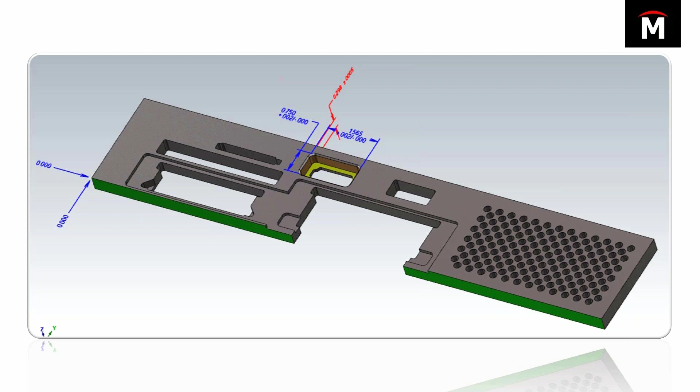So in this product, we're going to have it not only update for the G54 XYZ location, but we'll do a rotational update so that it outputs a G68 to our program to allow for an angular correction, thus giving you the confidence that even though the part could be potentially loaded off the pin a bit, it'll still run within tolerance. And then as we go through this, we'll cut the feature, and then we'll do in-process inspection, check these settings to make sure that the part is right, and if we need to, we'll update it.

So the next slide, I'm zoomed in a little closer on this. You can see on the length and the width of this pocket feature, we've got plus 2 thousandths minus nothing. Then on the depth of it, 0.298 plus or minus half a thousandth. These are the kind of things you run into in machining. Machining by nature is a very precision process. And when you've got tolerances like this, you have to really stay on top of it on the machine to make sure things are run accurately. And if it's run out of position for your true position tolerance, then the part's no good. It really leads to a lot of wasted money very quickly if you're not careful.

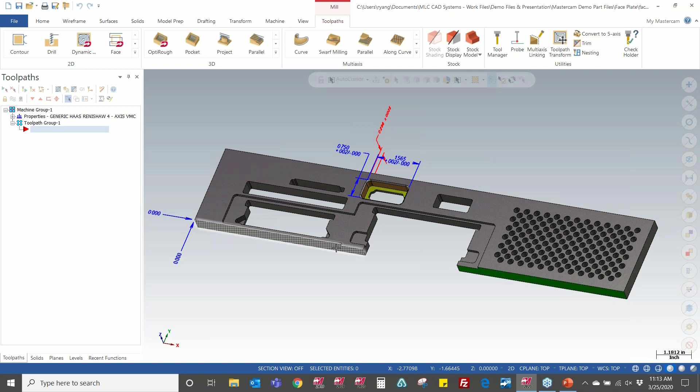What I intend to show you with this product is that this allows you to have the confidence that you can actually walk away from the machine and know that it's running accurately. Now, I'm not saying that you don't have to check your parts at all. There's still no substitute for checking them manually, but this gives you the confidence that the machine is checking itself. So let's go ahead and get down to it and have a look at how this product works. So here's the part file that I had in the slide, and we're going to start off by just setting our G54 XYZ location at this lower left corner of the part.

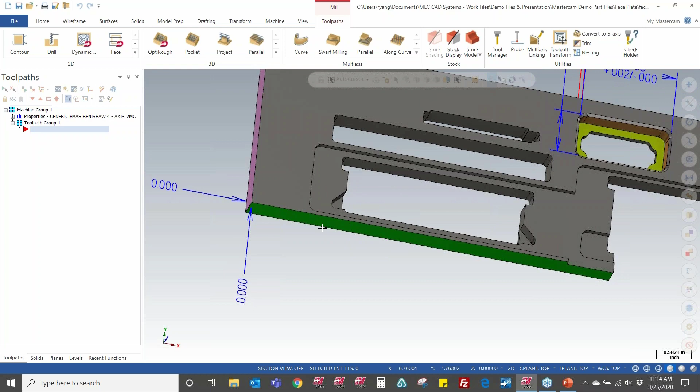So to do this, the first thing I want to do is draw some geometry to help me place the probe positions a little more easily. So I know I'm going to be probing for a G54X and a G54Y. And I'm going to do this by just drawing simple lines. I'm going to start by drawing a line to represent where I want my X to probe in from.

So I want to make sure that I'm in a 2D mode. I'll set my Z placement about the midpoint of this edge. Just when I'm drawing, it draws it down at that position. So I'm going to draw a line first. I'm going to offset the beginning point of this upward from there about ½ an inch. And I'll click, and that sets my first point.

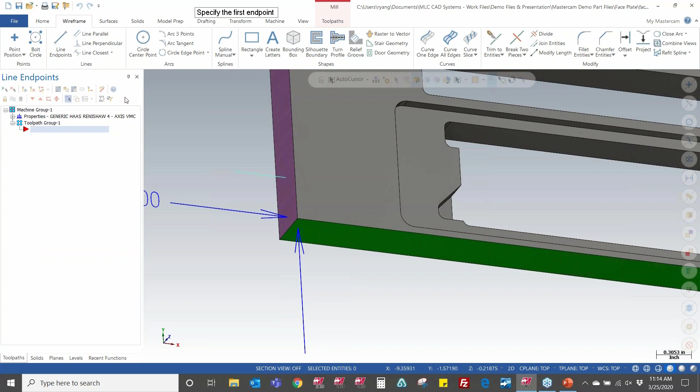And I'm going to draw that line straight out at a length of, we'll say, ½ an inch. So, this gives me a starting point and an end point for that. So now that I've got that line drawn in, I'm ready to do some probing on this.

So with Productivity Plus, it is an add-on to Mastercam. You have to purchase that add-on to run within the software. And if you have that add-on or not, you'll still see the probe button. You'll find it on the Toolpaths tab when you're in Mill. If you click it and you don't have a license, it'll just tell you that you need to get a license first. But here we've got what we need, so we'll keep going.

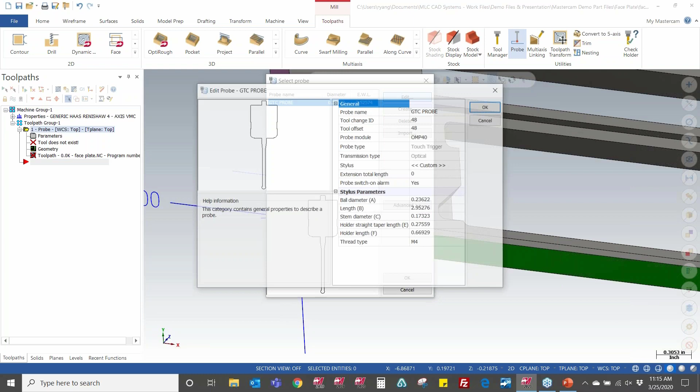So when I click the probe button, the first thing it asks me is to select a probe. And this is where you can build a probe for your specific machine. This one, for instance, I'll just click the edit. This is where you can tell it a specific name, as well as the tool number that you got it loaded in. And with these probes, you typically leave these in the machine. They'll be loaded in some tool number that's towards the back end of the carousel or however your machine is configured.

But this is where you tell it what tool number that tool is assigned, as well as the length offset number. Imagine when you're on a Fanuc machine, you've got your G43 line with the H offset. Just think of this as being the H offset for it. The probe module, this is a Renishaw part number, and you click that drop down, it has all the various probe module names for Renishaw products. In the case of a Haas machine, it's usually an OMP40.

And then for the stylus, this is where you choose what ruby or what diameter stylus you have at the end of it. And this goes by the Renishaw part numbers as well. This makes it really easy because the purpose of all this is so you get an accurate 3D representation of the probe. So when you're backplotting, you can see if you've got clearance issues, see if you maybe need to consider getting a probe extension or a longer stylus. Or if you're working on small parts, you may see that, hey, I can use a much shorter stylus.

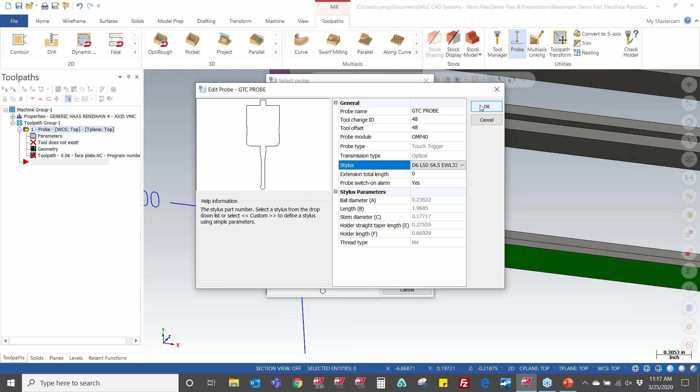The shorter that is, the better feedback you get. Just the longer it gets, the more that tolerance starts to vary when it comes to super precision. But the idea is you just choose a stylus out of here that represents what you're really using, and then that's it. You just click the OK button, and it shows probe in here.

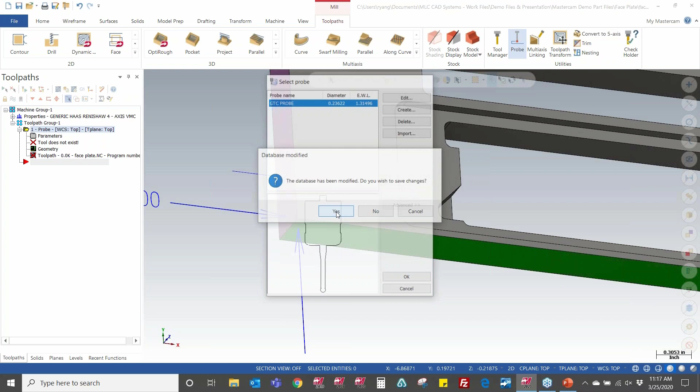You can also build other probes if you have more than one probe to the machine. You may have a probe that has a 6mm ball, and then you may have another probe that has a little 2mm ball if you want to get into really small features. Just think of this as your tool manager for your Renishaw probes. So then we'll click OK to that. We'll continue on. And now we're ready to work with creating a probing routine.

So this is the interface when it comes to doing probing. If you first get this product and for some reason it's just scrunched together like this, no big deal. You just grab that lower right corner, stretch it out, make it where you can see what's going on. But this is everything that we need to work with to make probing routines in Mastercam. We have our typical commands like cut, copy, and paste for quickly copying routines and making different changes to it.

We have a button here for configuring the probe. This configure button, these are things we go over more so when we do our implementation on site with the customers. But this is where we can set what Renishaw machine file we're working with. This is basically the post that controls for the specific machine we're on. In this case, we're on a Haas, so I'm just going to leave that as it is.

And then next to that, you got your measurement routines. We've got point measurements, line measurements, circles, different features, stuff like that.

And this is all stuff to, just a second here.

This is all stuff to do with just making physical measurements in the machine. Next to that, you've got the options for making constructed geometry. We'll talk a little bit on that here in a while. Got a good scenario of that when we go to measure for our depth. And then after we've collected our data, we've got our functions for what we do with the data. Things such as machine updates, a G-code block.

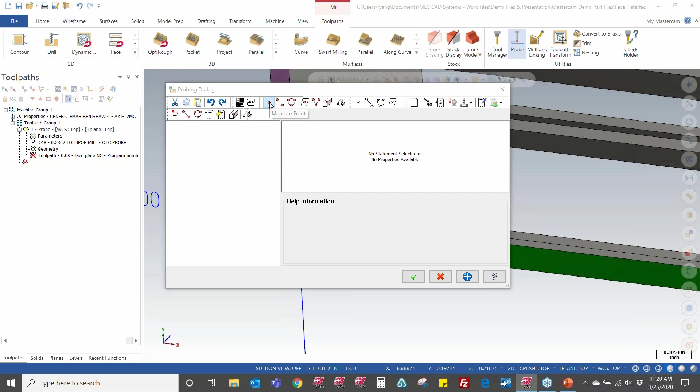First thing I'm doing is setting my G54 XYZ location. So what I'm doing is I'm going to probe a point, and that's why I drew this line. When it contacts this point, that's what I want to use to set my X0. So I want to press enter to that. And so based off the point I gave it, these are the values that it has.

So back up just a bit, go by inspection cycle first. I want to make sure I'm probing relative to my top plane, which I am. But these are the values that it got based off that point. Now, I see these values look a little skewed, so it tells me I probably need to reset my origin point. So I'm going to X out of that real quick.

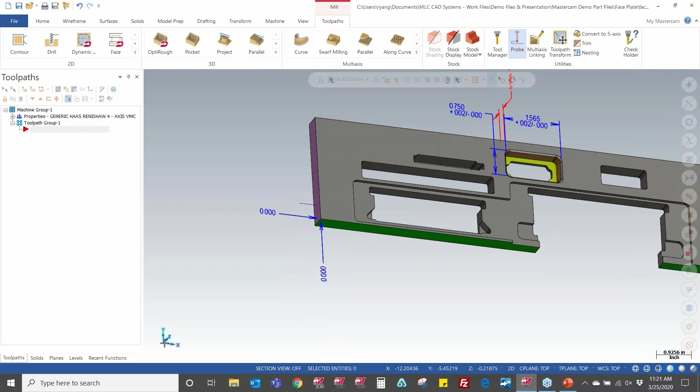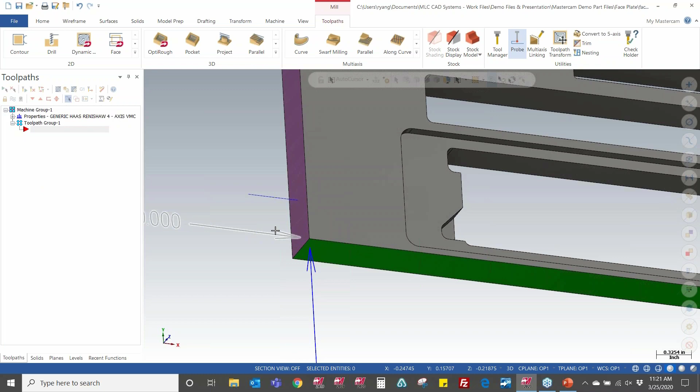Just going to quickly set my G54 XYZ origin to be at this point. I should have done this to begin with, but that's a good thing about this product. We're seeing that we need to make a change now. So I'm going to go ahead and do that. And we'll call this our OP1 plane, and we'll make that be our active work coordinate system. So now that I've done that, we'll try this again.

I want to go and make a new probing routine. There's the probe we're using. Now I want to measure that point, and that point, again, it's going to be this position here. I'll back up a bit, make sure it knows that we're going to be using an OP1 construction plane. And when I look at the points given, these are the values that are assigned. So now it makes a little more sense.

So the point position 1 is where we're actually contacting the part. The approach point, I want to make sure I set that approach point to be this end of the line. That's why I drew this out here, so I can capture that value so we can feed it in along that vector. So now that we've measured that point, I need to tell the machine, or tell Productivity Plus, what we're doing with that data.

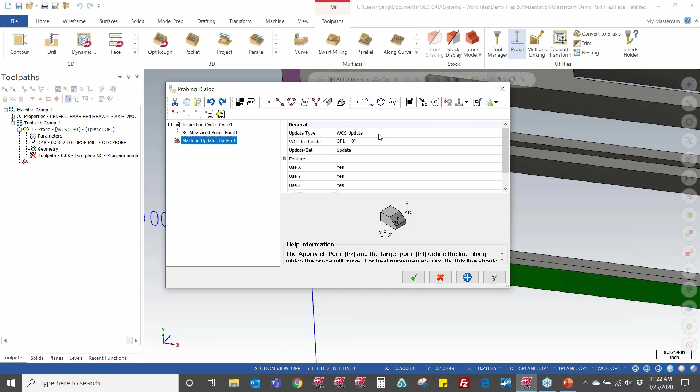So with that point we measured, I'm going to do a machine update. That's what that NC button is. And what we're doing is a work coordinate system update. You can see you've got different options to choose from here. We've got various others that we'll come across here in a little while, but we're going to do a work coordinate system update. And I need to tell it what feature I'm using to make this update on.

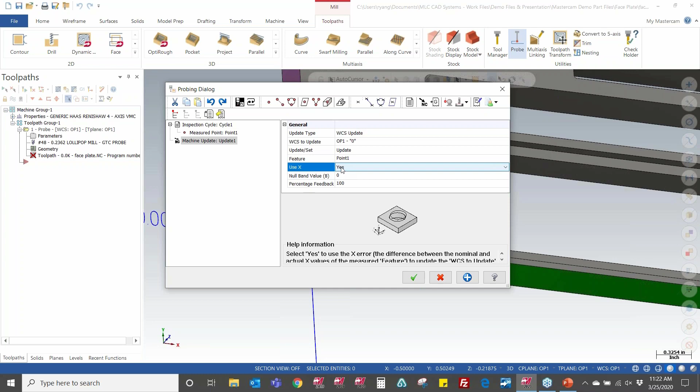Well, that feature, if I click in here, I can choose this button at the far right, it gives me a list of features I've probed so far, and all I've got is point 1. Well, it knows with that point I can update the X offset, and that's it. I just click the green check.

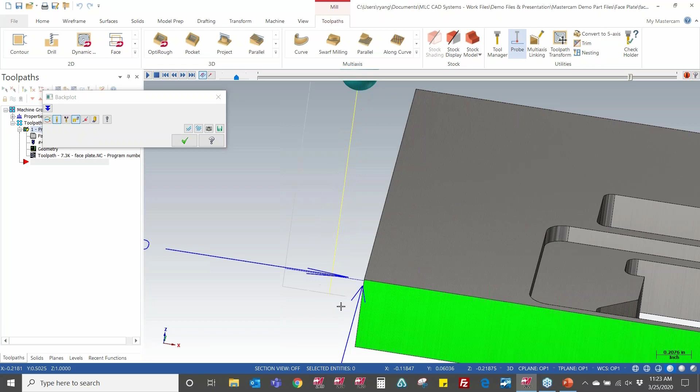You can see now when I backplot it, it shows just like a normal toolpath backplot, it lets you see the probe doing its work. We go in and zoom up close at it. You see that the point we picked, it knows to go off the stylus center, and we're just going in and hitting that point and backing off. And with it, we're updating our G54 X offset. So now we've got that. We'll go ahead and continue with the rest of these features.

So I'm going to draw another line. And what I'm doing, I'm just holding my shift key and selecting that point while holding shift. That way I get the dynamic gnomon. And I'll just go and span it over to here. And I'll back it off to, let's say, 1/2 inch.

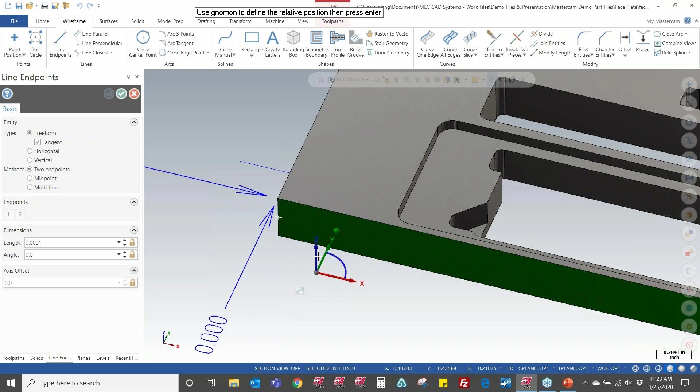Or actually, this is my beginning point. So I'm going to go and draw it in line with that. And then I'll press enter just so I can draw that line straight out off of that. I'll draw this one at a length of 1/2 inch. And so we've got that now for probing Y.

So I'll just go back into that probe routine and we'll do another one. We'll just probe a point. The idea here is just showing you how simple this is. You just choose the point where we're contacting the part. I'm going to alter that approach point so that it's at this point out here at the beginning of the line. And now that we've measured that point, we'll do a machine update.

The feature we're using to update this time is point 2. Again, when I click that box, it just gives me a list of measured features I've gotten so far. So with point 2, it knows it can update the Y offset. Notice here there's an option called null band value. I just have it at 0.

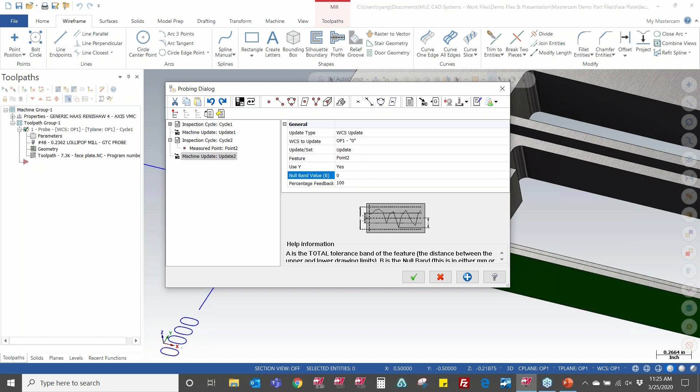What this is, this lets you specify a tolerance that if the correction value it measures is any less than what you give it in here, it just ignores it. But I prefer to have it update every time. So I want to leave that at 0. While we're measuring it, why not just update? So good to go on that.

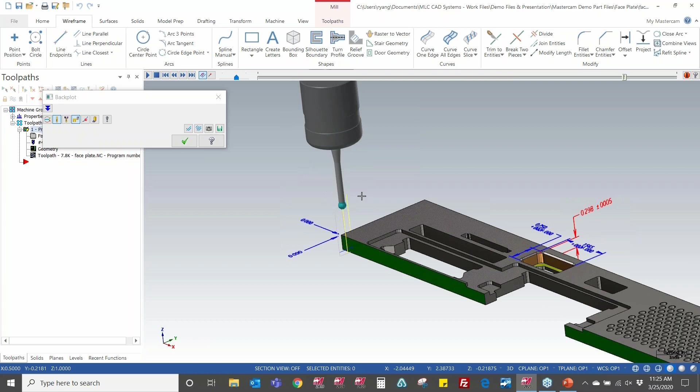When I regenerate it, I can go to backplot. And when I go to backplot, it just gives you a visual cue. And having this representation is very nice because imagine you had some clamps in the way, and you see you're going to have interference. Well, you see now before you get to the machine that you may need to go pick a different point or set a higher safety plane.

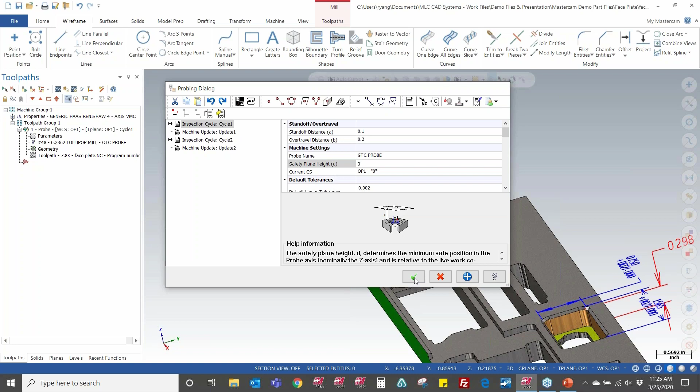Like right now, you can see it looks like we're raising up only about 1 inch over the top of the part. Well, no big deal. You can go in and make changes to that. Right here, the safety plane height for this, so we'll make it 3 inches. And I'll do the same for that previous inspection cycle, make it 3 inches as well. You just regenerate.

So now we've got that, we can backplot and see that we've got our probe starting much higher. If you've ever worked with one of these probes, I'm willing to venture that you've probably dealt with breaking one of these styluses. I've done it several times, but the worst one is bumping that head. If you ever bump that head into something, that gets expensive.

And having the ability to see beforehand if you need a longer stylus or an extension, that almost pays for this product in really only about 2 or 3 instances. So it really starts paying dividends really quick, being able to probe all this up front. But we'll go ahead and continue.

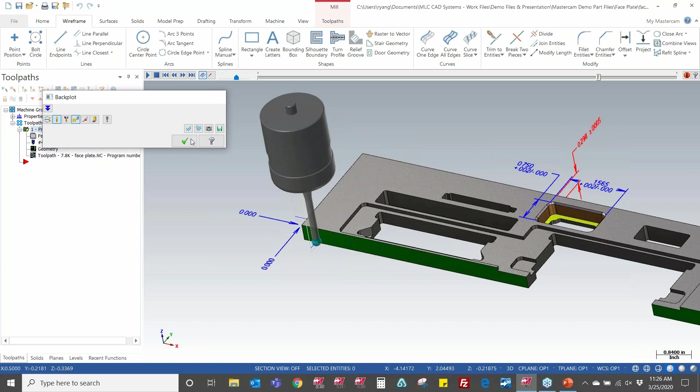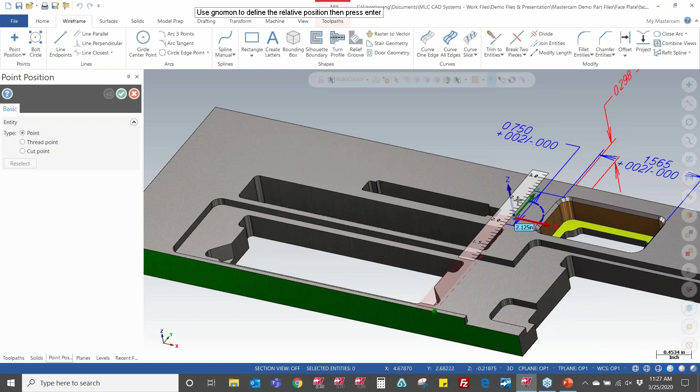I need to set my Z0, so I'll just go ahead and draw this point. Instead of drawing a line, I'm just going to draw a point. Say I want to set my Z0 somewhere over here near this pocket. So I'll just scale along the X and I'll scale along the Y, and let's just get pretty close to it because we know this pocket's got a really tight depth call out. I would rather probe my Z0 near that rather than over here in the corner. So we've got that point selected.

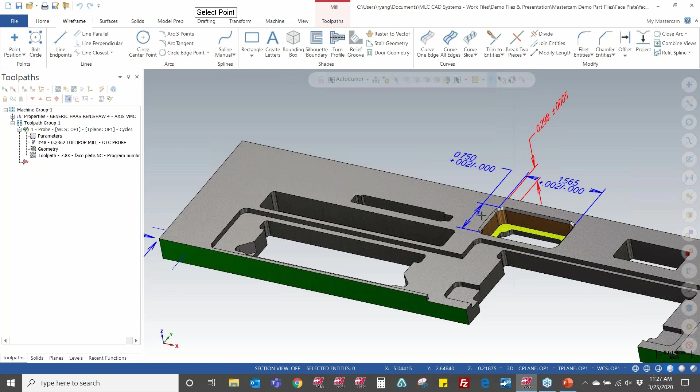I'll just jump back into this probing cycle, and we'll do another probe, a point. We'll choose that one we just drew, and by default, when you choose a point, it thinks you're probing in Z anyways. So you can see on the approach point, it starts at 1 inch over that point. So we'll just get a little closer, more like a 1/2 inch away from it for the approach position. And then we'll do a machine update with this.

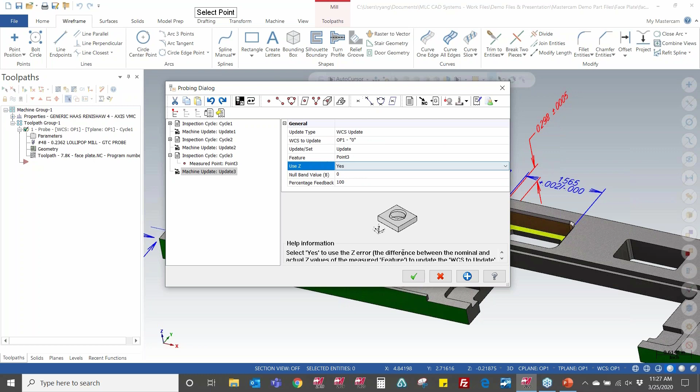We'll use that point 3 that we just picked for it. It knows we can update Z with it. And we'll click OK. Regenerate everything. And when I draw out all the paths we've got so far, this shows us the path that the probe is taking to get to that point, and then from there we're ready to begin. So it really makes it easy. And what we just did right here replaced having to go to the machine and write this out manually.

So let's go ahead and fast forward a bit. Let's say that we've already created our toolpath to contour the part, knowing these features.

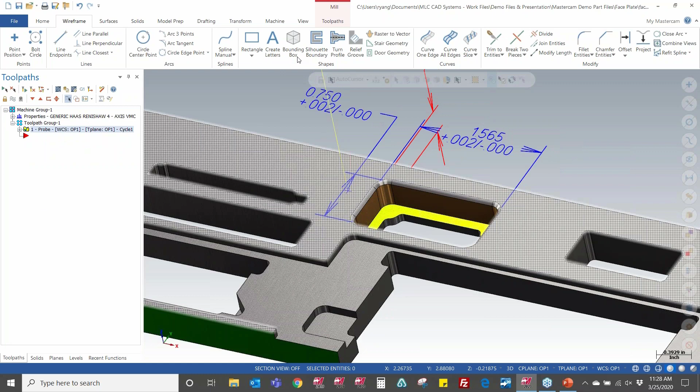But let's say that now we're to the point where we need to take care of machining the precision features of this part. I know I'll have a lot of other toolpaths before it, but let's just say we're going to do a contouring toolpath, go in and do a precision finish around the inside of this. So I'm going to create that real quick.

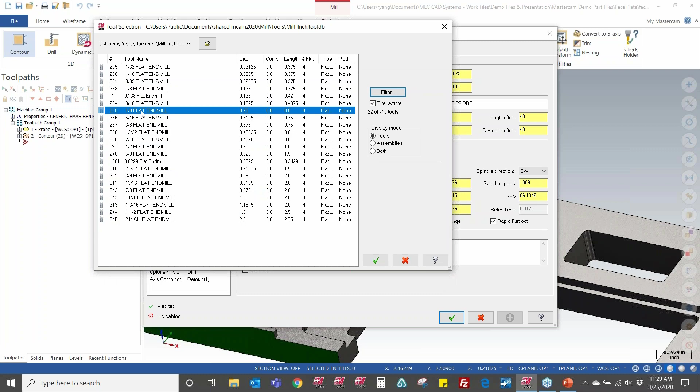We'll say we're going to use a 1/4 inch end mill to do this. So go to my tool library. I'm going to find a 1/4 inch end mill to create this path with. And because I'm doing a really tight tolerance finish on this, I'm going to turn on maybe a couple of spring passes, just so I can be certain that we're taking a few dead passes and we're eliminating any possibility of tool flex when it's cutting in here.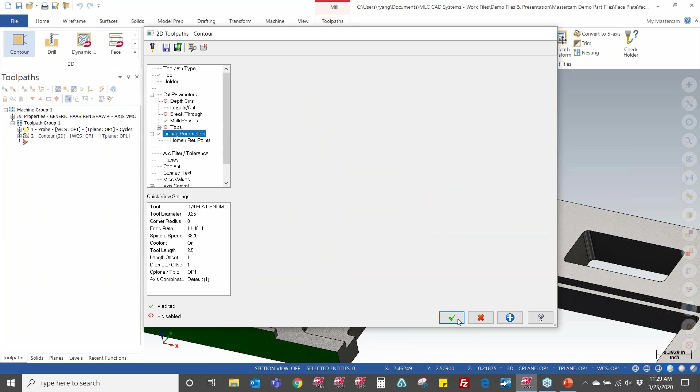So we'll choose OK to that, let it write out the path. I'll go ahead and backplot it a few times just to make sure that what I'm getting is what I need it to do, and it looks like we're taking care of this. So this would be the kind of scenario where I would want to have that probe come back and measure this after it's run and see if we need to update our tool offset or not. Not only that, but if we need it to rerun, I'll cover that as the second part of this.

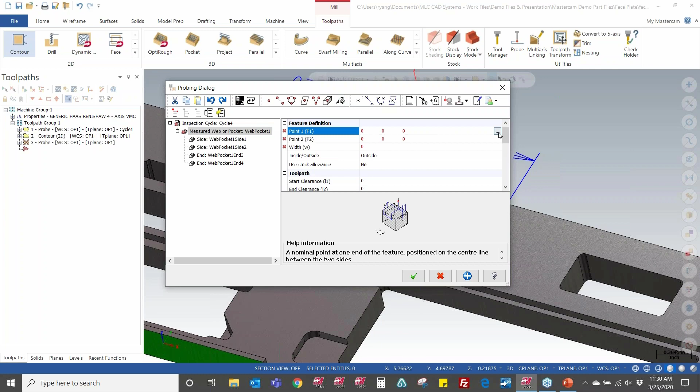So first off, let's just check this feature out to see if we're indeed in tolerance or not. So for that, I want to make a probe routine right after it. Instead of measuring points, I want to use this option for measuring a web or a pocket. The idea is you choose the midpoints of each end of the feature. So the first point, I'm going to choose right there. And then the second point, I'm going to choose over here, the midpoint of this end.

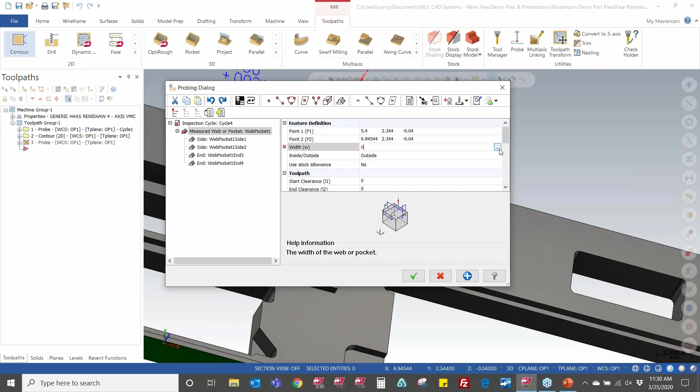Now you can see that it fills in the values, but some of these are red. It just means that I don't have enough data yet. So for the width, I'm going to select from this point over to this point, and it knows that's how wide that feature is. And you can see when we look at our tolerances, I've got +2 -nothing on the width and the length. So we're going to tell it we're probing on the inside of this. I'm not using a stock allowance. That would be like if you're using raw stock, but none of that right now.

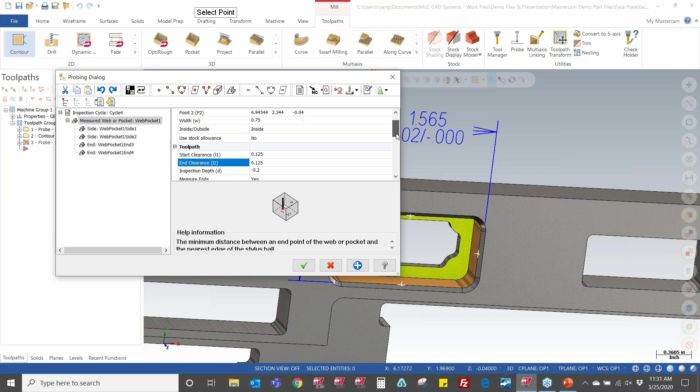For the start-end clearances, it's going to probe at least two points along the length of this feature. And if we start at 0, we're putting it right on the edge of it. We don't want that. We want to offset it away from that. We'll say about 1/8 of an inch. Same thing on this side, do 1/8 of an inch. The inspection depth, where the stylus is hitting it at, this is where I would just plug in, say -.2 of an inch. And keep in mind, that's to the center of the stylus. So now we've got this.

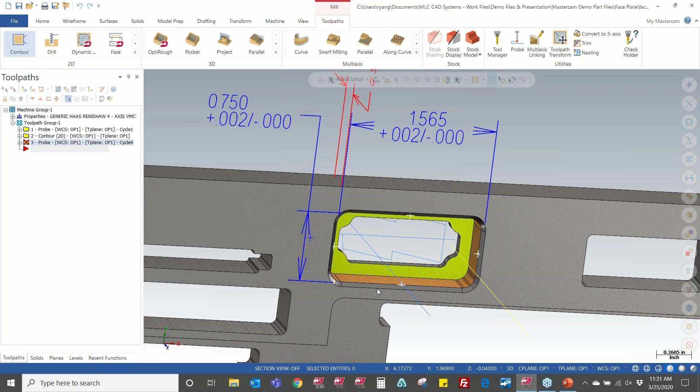Before I do anything else with this, I just want to backplot it and see if it's giving what I'm looking for. So I go to backplot it. Oh, first off, I can tell we're way too deep, so I need to go and adjust that inspection depth. So let's go do that real quick. Choosing on that pocket again, I can see what it is. That inspection depth is an incremental value with respect to the Z points that we'd picked for our beginning measurement point. So we're just way too deep.

Let's try -150. And this is the kind of number that you guys can work with, so you get more like what you're needing it to do. There it is. It's hitting in a little lower. It's more like what we're seeing. One thing I don't like, I see how when it measures a point, it's making a diagonal move from it to the next. And that's because we're set to use shortest direction. So I'd rather not run it like that on the machine.

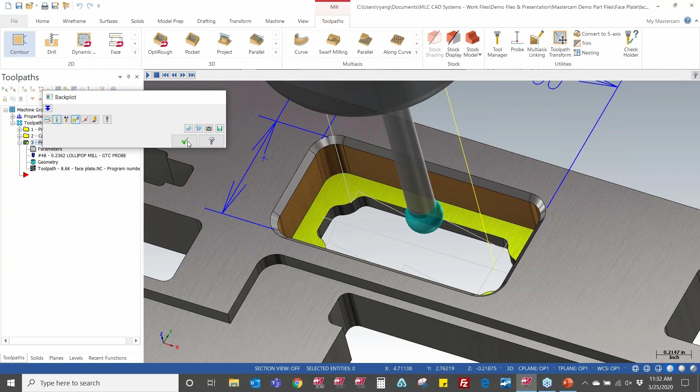So that's the beauty of this product. You can go back and make changes, edit this thing as you go along to give you what you're needing. We want to use linear mode. So I'm going to regenerate that. Now this gives us a little bit more of what we're looking for. So it's measuring 3 points along it, and it measures each end, and that's it.

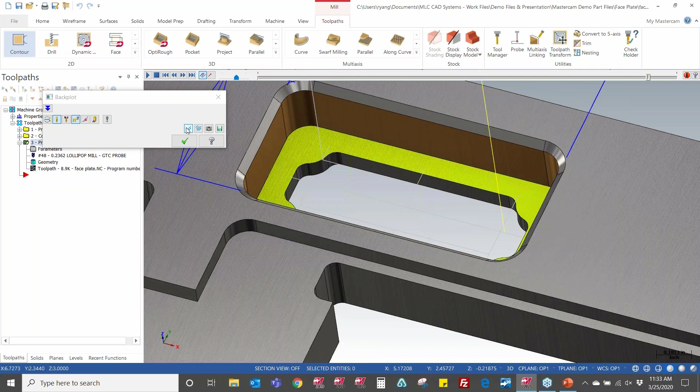Now, if you're wondering about what's controlling the number of points it's measuring, well, that's controlled within the cycle. And see that this gives you various options, and I think you can probably tell that this is a lot more comprehensive probing than what your machine even gives you. This lets you really get things down to the nth degree with it. I mean, you can tell it.

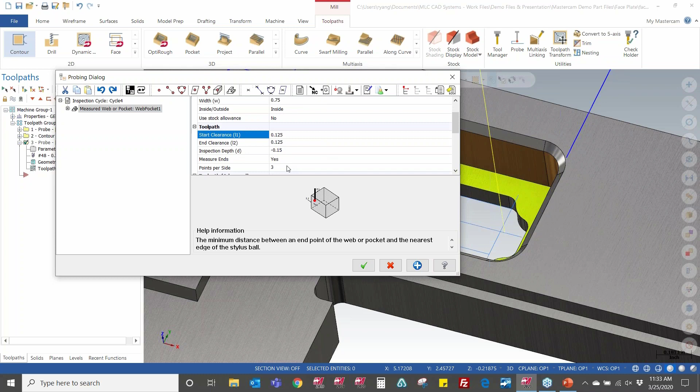Right here's the number of points we're measuring, 3 points. Say you want to measure 6 points. If you want to get super accurate, make sure that you're checking across an average of it. It just gives you unlimited potential on being able to be as precise as you want. So now we've measured that. The probe has found what the length and width is of this feature.

So what we want to do is tell it to update the tool based off what it just measured. So for that, we're going to do a machine update. And in that machine update, the update type this time around, we're going to be doing a tool diameter update. So for tool diameter, what we want to tell it is what is the tool number of what we cut that feature with. And we're going to say it's tool 1. Or, this is where you plug in whatever tool it really is.

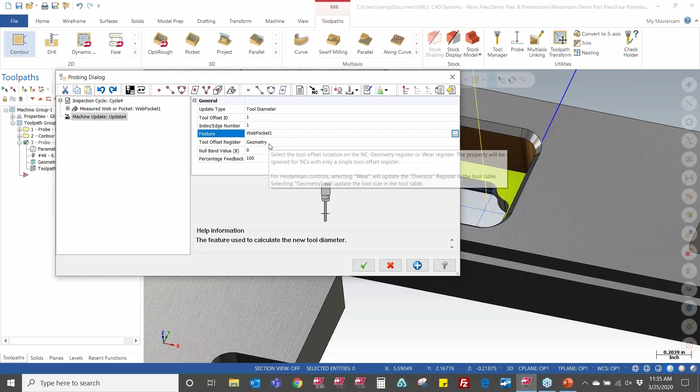Now the index, the edge number, think about this as what D offset you're using when you're using cutter comp. Well, on a Haas machine, we usually use the same number as our tool. So we're going to set that at 1. And then the feature that we're using to update it, that's where we go and choose from our list of measured features. And here's that web that we just measured, or the pocket. And it knows we can either update the tool geometry or wear.

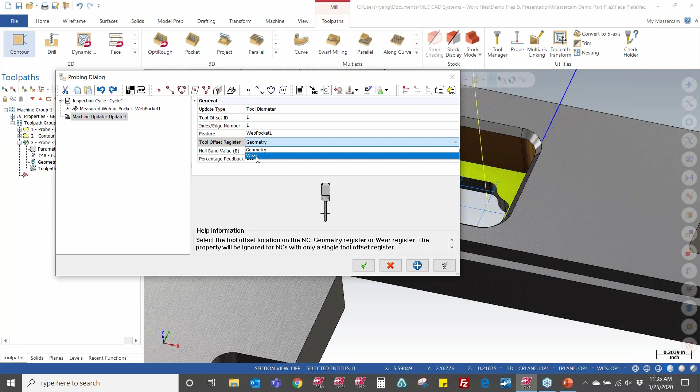Now this is where you want to keep in mind how you programmed your contouring toolpath, whether you're using cutter comp set to wear, where on your machine you set your diameter columns at 0, or if you prefer to use the cutter comp in control, so you can enter the actual tool diameter at your machine, that would be geometry. You just want to make sure you use the right one, so it's applying the right corrective amount. So we're going to set this to wear. That's what I typically train people to use, and then that's it.

So when you've done that, that's going to run that feature, and then it's going to update the tool offset to make it right. Now, that's not going to tell it yet to go back and rerun it, though. If it's too small, to go and update the offset, to first update it and then rerun, or if it's too big, we can just have it flag the machine that the part is scrapped. It's non-conforming. So that's what I'm going to get into here, on the next bit of this.

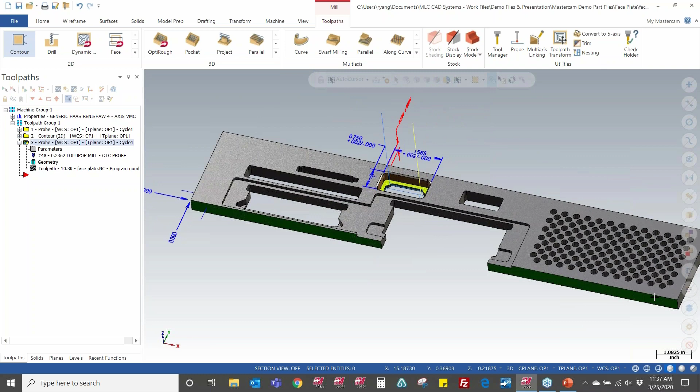All right, so before I come back to updating for a tool diameter, I talked about the analogy of, let's say this part was loaded off of the dowel pin at one of the pins on the plate. So now this part is sitting at an angle. Well, if we run the part like that, we're going to cut this out of position. And if we've got a true position of 0.001 with respect to datums A and B, you're wrong from the get-go.

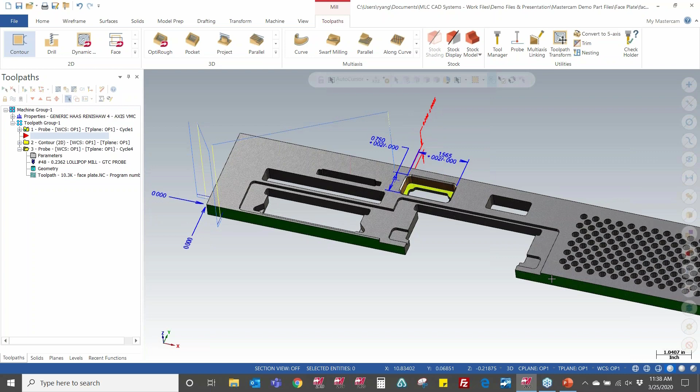So I want to include into my probing an option to correct for the rotation of the part if it's loaded off like that. So to do that, in my original probing cycle up here, when I'm probing for X, Y, and Z, I'm also going to probe a line. I'm going to hit along the length of this to make sure that we make a correction for it.

So before I do that, I'm going to turn my shading off, make it a little easier for us to see against this. What I need to do is draw a line across the length of this part. I'm going to start by drawing it from this point and drawing this over here. This line is what I can use to check for the angular orientation of the part.

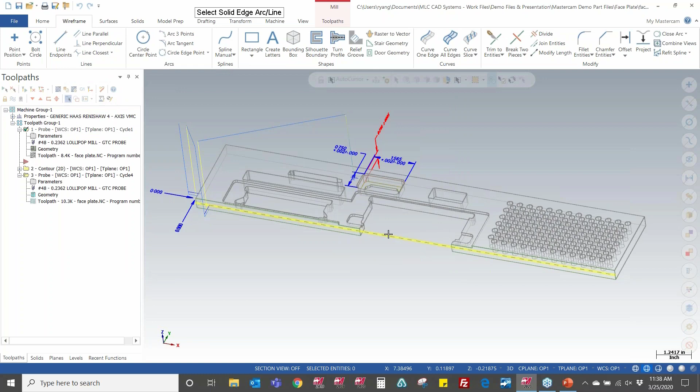So I'm going to go back into my original probing cycle after we probe for X, Y, and Z, and I'm going to have it probe a line along the length of this. For that line, I want to choose what we just drew, and I'll press enter. So it knows the endpoints of that line. I can tell it what direction I'm probing at. It automatically defaults to positive Y, but you've got your other options here as well. The inspection depth, where I'm measuring it with respect to it.

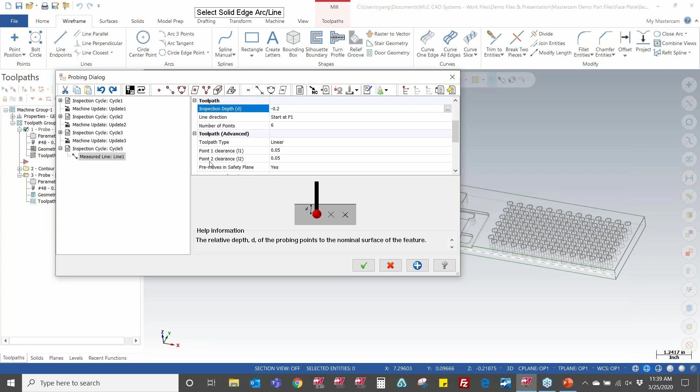And then the other thing is I don't want my probe hitting on those exact corners. This is where the l1 and l2 clearances come into play. So let's say I've got my dowel pins a half inch in from, well, they can't be a half inch because that's where I probe. Let's say it's in by 1 inch from each edge. So I would probably want to probe 1.5 inches in, just so I can avoid hitting where those dowel pins are.

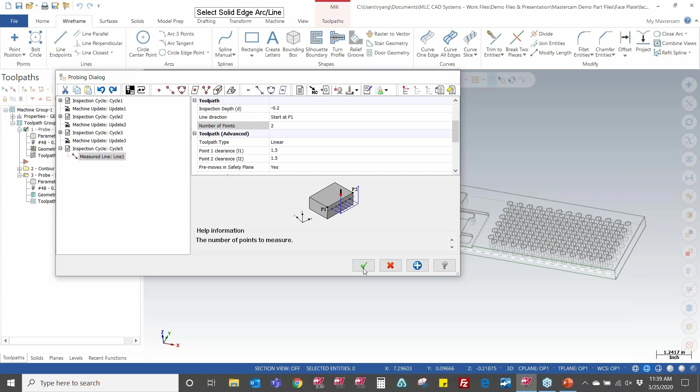And obviously I could have had that modeled in my file to make it more visual, but let's just say I know that I can probe in by 1.5 inches, and for the number of points, I'm just going to probe 2 points. So with that said, I click the green check and I'll regenerate it. So in the back plot, what I'm expecting to see is, move this out of my way here real quick. I'm going to backplot this through X, Y, and Z probes.

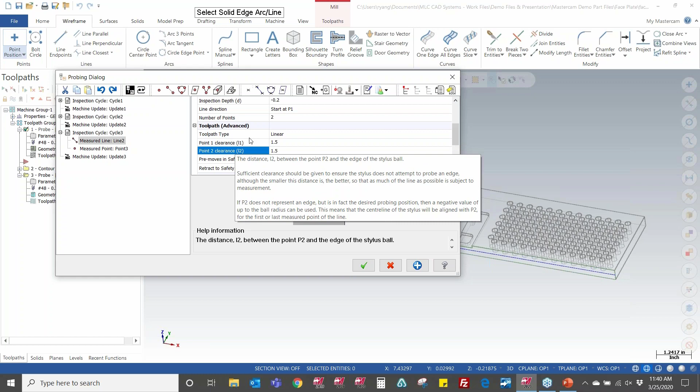And I thought I had that line in here. Did I not have it? Yeah, I guess I never did complete that line, so let's do that again. Number of points, we'll do 2 points on that. Our end clearances, make them 1.5 inches. I want to make sure I don't have any red in here. If there's any red, then, oh, I see it, I put that line in that inspection cycle. I don't want it happening where I'm probing Z.

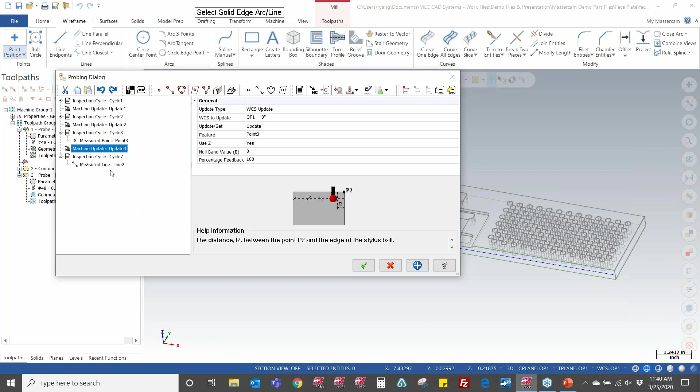What I'm going to do is make a new inspection cycle, and at the bottom, I'm just going to drag it underneath that machine update, and then I want to drag that measured line down into this. There we go. And this empty inspection cycle, we'll just delete that. So now that that's in there, I should be able to regenerate and see all of this happening. And yeah, there we go.

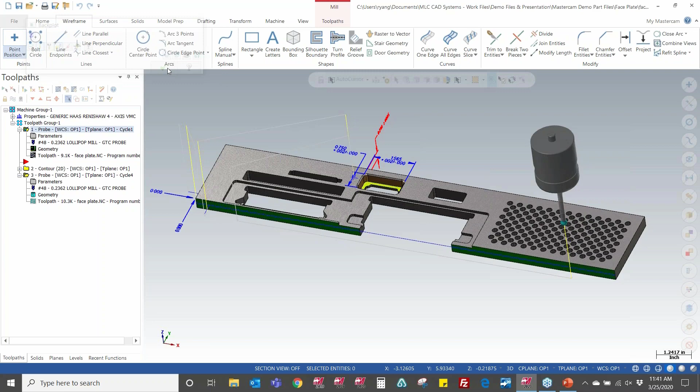So now when I backplot it, here's our X probe, here's where we're probing Y. Here's a probe for Z, and then we're going to check for that angular orientation, and that's that move we've got right here. So now that we've measured that line, I need to tell it what we're doing with it. What I intend to do is a G68 rotation to control for that error. So immediately after that measured line, I want to put a machine update.

And before I do that, something I'll point out, if you want to rename these things, you can. Let's just call it line for G68. You can't put spaces, so we'll put underscores. The reason I'm doing that is just to make it easier for me; the longer this list of probe features becomes, the more confusing it can get. So I'm just going to have it written like that. Now we'll do a machine update.

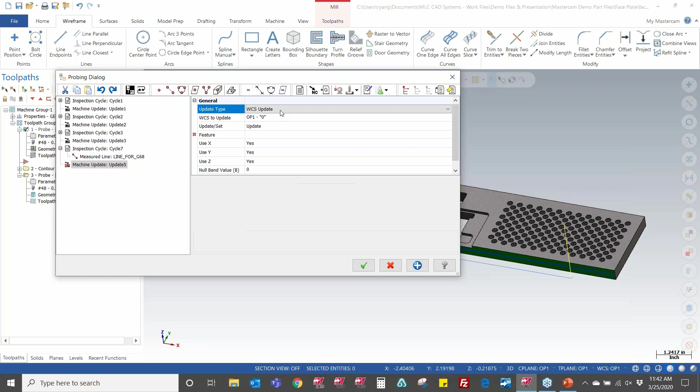For the update type, one of our update types is a rotation update. For the rotation update, the feature we're going to use to update it, you see now how it shows in here as that name we gave it. We're going to update around Z. And that's it. It's as simple as that. When you've got that in your program, it will output that command in your NC file to spin this guy around the 0 point to put it accurately where you need it. I think that's just so cool.

You know, with machining, inevitably over a long period of time, you just learn some things the hard way. And I mean, who hasn't loaded a part that got just a little tweak off of the setup pin?

This gives the assurance you can keep going. You got true position of 0.001, and you're having to cut this feature on a second or a third op. This gives you the assurance that you can put that right where it needs to be, and it's going to be made right. So I just think that's really cool.

And something I'm going to point out is that rotation update doesn't only have to apply to G68s. If you have a 4-axis machine and you've got a part in the 4th axis that you need to accurately clock to a milled feature, this lets you do a probe in the negative Z direction to control for that. It also applies to 5-axis machines where you can do a rotation update about the 4th and 5th axis, and you don't have to worry about the part being off the line. Really cool stuff with this.

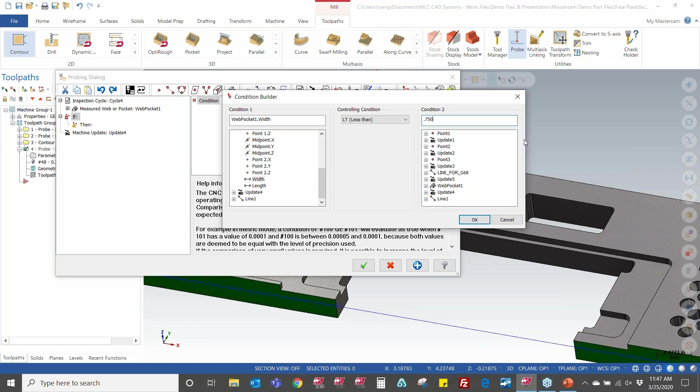So basically it says if the width, and I set a condition, if the width of it is less than, and I want to pick a value. I know that the width of this feature is 3/4 of an inch plus 2 thousandths minus nothing. So I type in the width of it is less than 0.750. If we're measuring less than 750, that means we're undersized. We need to update the tool.

Click OK to that. So now it says if the web pocket width is less than 3/4 of an inch, then I want to do that machine update. I want to drag that machine update right on top of that then, so it becomes a child component of the then statement.

Okay, so if it measured less than 3/4 of an inch, then we're going to do a machine update. And after we do that machine update, I want it to go back and recut that feature. Well, to make it go and recut that, that's where you go and choose over here on the right of the ribbon, you want to add a go to. So a go to, that's where I tell it to go to whatever label it is I put in front of that finished pass.

So right now it's just listed as label 1. I'm going to go and choose over here. I'm going to set, and this is why we renamed it earlier, I'm going to have it go to that restart for recut. And that's it. We click the green check, and we regenerate it.

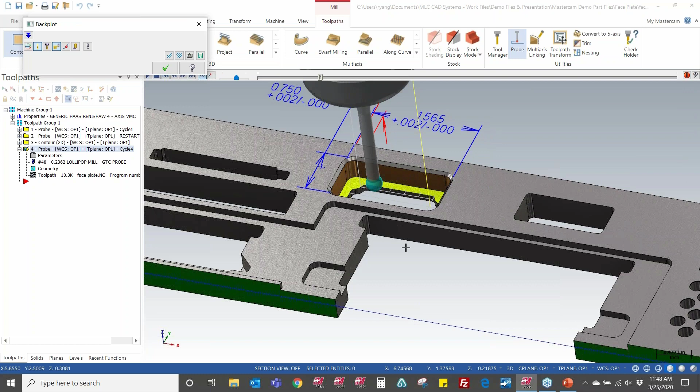What's going to happen is when we go through and probe it, and it finds that it was undersized, it's going to do that machine update, and it's going to send it right back to that restart. And right after that restart is the finished pass. This is how you make your program recut that feature now. Pretty cool stuff. This one really makes a lot of customers happy when they know they can have it check itself.

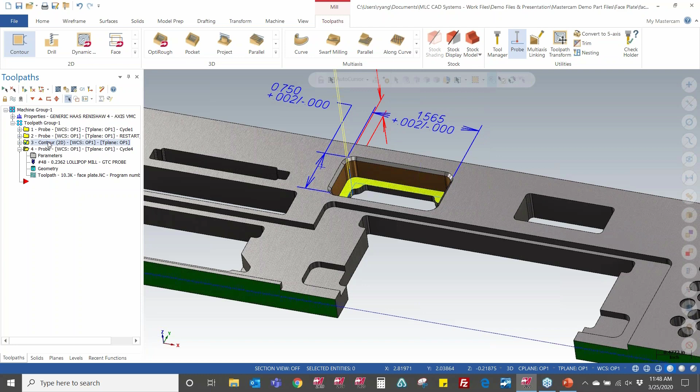So we've got the condition for if it was smaller than. Now, how about if it was greater than? Well, if it was greater than, it's just going to continue on out of this cycle, and it keeps going. And then it cuts other toolpaths, in whatever order you've got your operations in. Now, how about if it cut oversized? If it cut oversized, that could be an issue.

So that's where you would add, make sure you click on the if statement first, an else if. The else if condition this time is, let's say the width of it measured too big. So if the width measured greater than, not greater than or equal, but greater than 0.752, which would be the top of tolerance, then I would have it do

some of our customer shops will have it do like a G code block. Where's our G code block at? Right there. And I would drag that G code block up into that statement, and this is where you can have it output the alarm on a Haas and say #3000 equals, and then in parentheses 1, comma, and whatever comment you want to display to the screen.

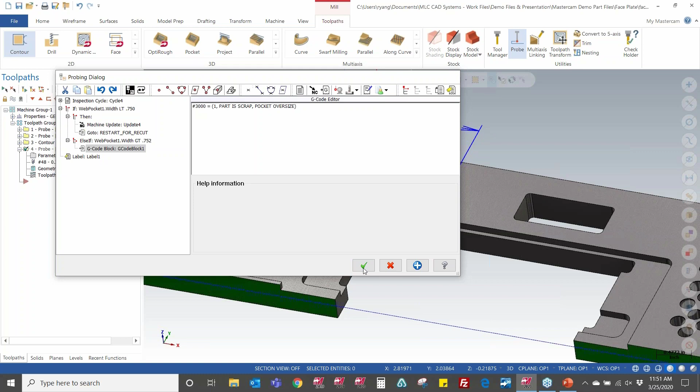The next thing is, we have this pretty tight depth to control. It's even tighter than our length and width. So I may want to go and probe the depth of it, but I don't want it to just return a Z value at the bottom of that pocket. I want to find the difference between the bottom of that pocket and this point. That point may have changed throughout the run.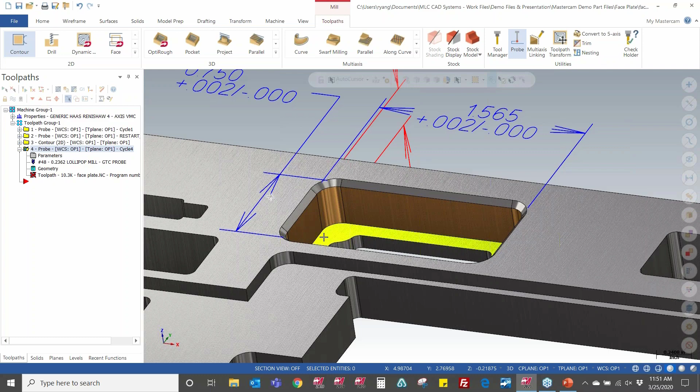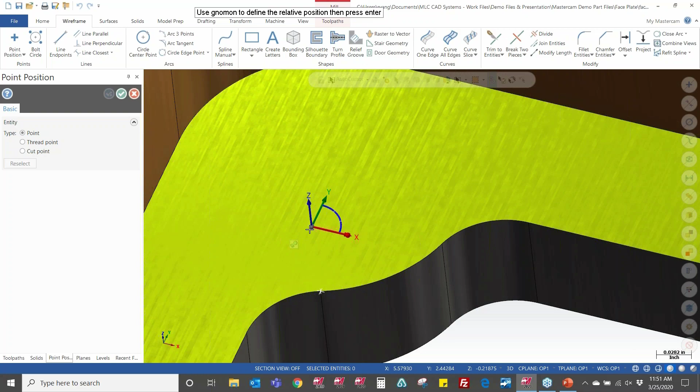So I'm going to draw a point to measure off of down here. Let's just move it in off that edge by about a 1/16 of an inch, maybe over a 1/16. Just picking a point at random to measure at. And I'm going to have it do a check on that. I want to make a new probe cycle just to keep things a little simple, a new probe where I go in and measure those 2 points.

Earlier when I was doing G54 XYZ updates, I was just picking a point at a time. I can pick more than one at a time. So I just picked both of these, and it shows as measured points 4 and 5. I want to rename this one here, let's say top of part, and we'll rename this one the bottom of the window.

And it knows that we're probing in the Z direction on these. And so I need to find what the true distance is in Z on that. So this is where we use the constructed geometry, these ones we've got here. So constructed geometry, I'm going to say construct a line, and for that line, I'm going to drag references in from those 2 points I measured. So between those 2 points, it's constructed a line.

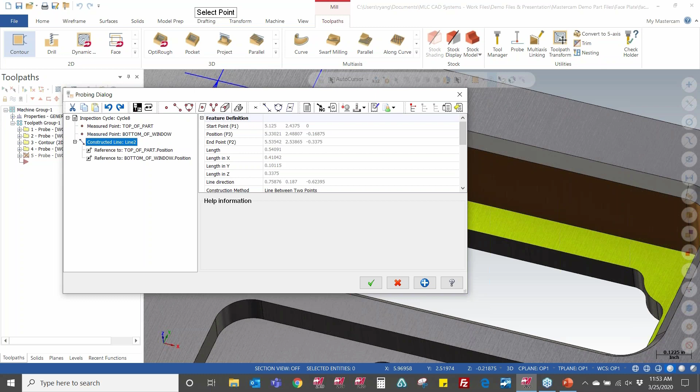Now, right now, I know that line is diagonal, but what I want to do this time is control for our depth setting of the tool, if we need to compensate for the length offset. So now we've got that constructed line to work with. We can do a machine update again. And this one, I'm going to do a tool length update. And this, we know it's tool 1. It's offset number 1 we're using.

For the feature we're using to update this, I'm trying to find, may have just shot myself in the foot here. Let's say we're going to base off the bottom of the window. Now that's going to update based off that bottom point. But this again is where I would probably want to create an if-then statement.

So I want to create an if statement, and for a condition, I want to take that constructed line that we created and see, here's all the components of that constructed line that we got. And of course, you got the diagonal length, but notice you can also get the length in X, Y, or Z. Well, that length in Z, that represents, like if I'm using my depth mic to check the depth. I'm going to say the length in Z. And this is where you use your conditional statements: less than, greater than, and you go by the tolerance given.

Let's just say we'll use, if it's less than, I think it's 298. If it's less than 298, we'll just drag that machine update into here and let it do a machine update to control for the tip of that. And then we do another one, drag that afterward. Trying to drag it after the fact here.

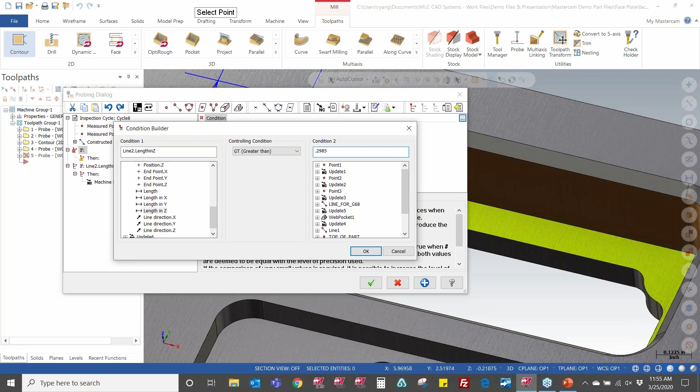There we go. So this one, we'll say if the length in Z of that constructed line is greater than, I think it's what we've got, a thousandth tolerance. So if it's greater than 0.2985, then we'll do a machine update again. But this time, it'll keep that tool comp basically to keep it in range of what it needs to be to maintain that tolerance. So having that's a really nice thing to have.

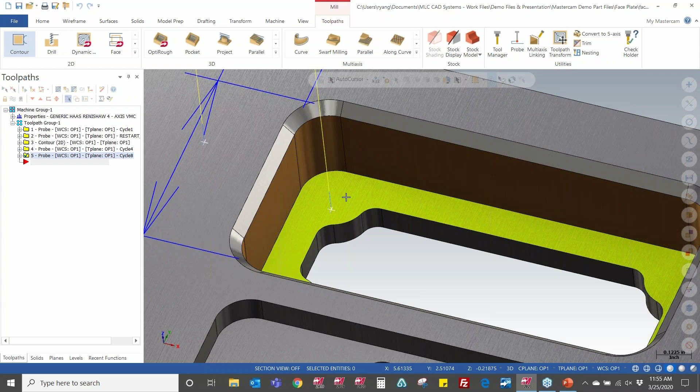So other things to talk about. I know we talked about outputting the data. Let's just take that window. That might be a precision feature you want to output the data of. Well, we'll go back to that probe cycle where we control for all of this. If you want to output that data, that's where you can use the reporting option. So when you do reporting, you basically just drag a reference in of what you're wanting to report, or just have it output all the data it captured off of that web or pocket.

And this is what will output the lines of code in your program. Like the Haas, for instance, it's the DPRNT command. You'll have to have a computer set to capture that data at the end. And something I'd mention is it outputs as a basic text file. But Renishaw, they have another software called Renishaw Reporting. It's a software that captures it in a graphical format. Basically, like you'd imagine your CMM capturing this data, it lets your machine do the same thing. So if you want to do reporting, that's one way of controlling for it.

Other things you can do, I talked about the tool breakage and tool wear detection. Let's say before you even run that probe on that window, let's make sure the tool isn't broken. So I'm going to put my red arrow up above it, and we'll do a probe cycle. Another thing you'll find in this probing is options for tool setting. So I click this drop down. We've got our broken tool detection methods, and this covers more of the Siemens, Heidenhain, and Okuma methods.

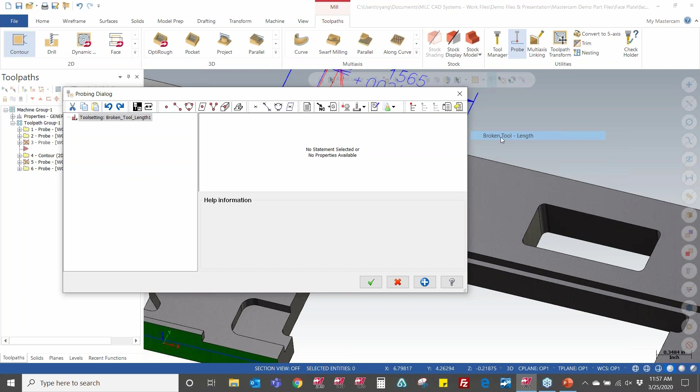I mean, this was me, and I know I'm doing it with a half a thousandth of tolerance. If I was any more than a thousandth difference from one touch off to the next, I would want to know. So you just plug that in, and that's what writes out the code for you to make that happen.

And speaking of the code, let's have a look at what the program looks like. So I know that we obviously don't have a complete part program. There's a lot more features on this part to cut, but let's just post out what we've gotten so far. When you go to post this and you click on your G1 button, we go through typical post-processing steps, so where we want to save the NC file, and then it comes up with this window.

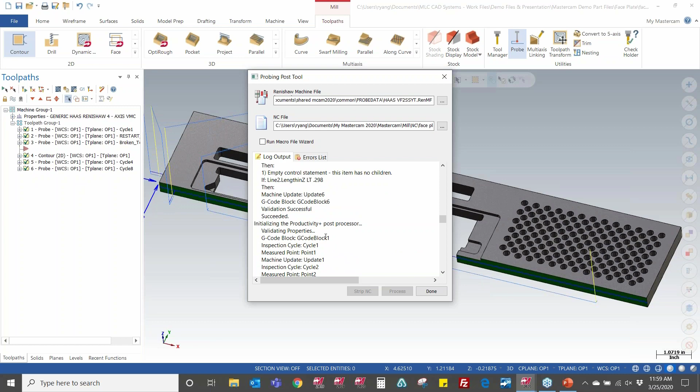This is unique to when you're using Productivity+. This is the Renishaw step of it. So we just simply click the process button. It builds up a list of things here, and we're just looking to make sure that each of these steps succeeded. And looks like we're all good. So we'll go ahead and click done, and it finally launches in the editor.

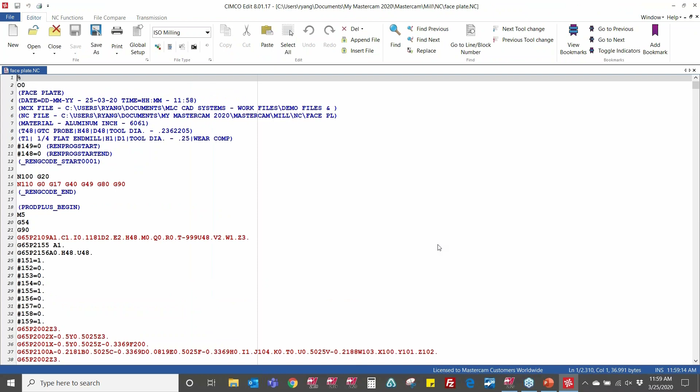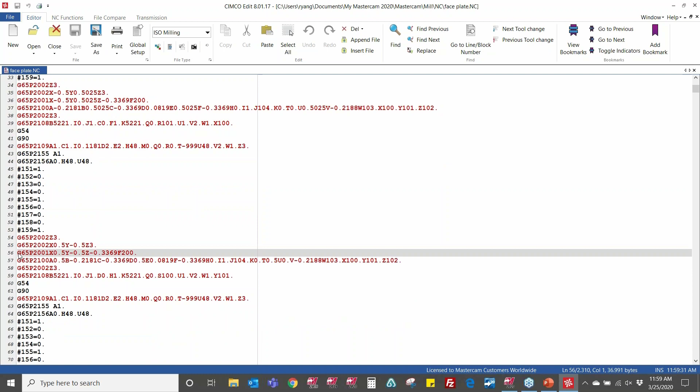And this, make this a little bigger so we can see it. This is all the code that's written to make this happen. So you remember at the very beginning, we're touching off our X, Y, and Z. So all this code, imagine writing this manually. I don't want to do that. This is what this product is doing for you. And all these G65 macros and all these values passed to it, that's all the logic this is using to make this run like you're needing.

So anyway, it gets done running all of the original probing, and then here's the code where we're going in and recutting, where we're cutting that window. And then right after that is all the code that has to do with where we're checking the width of it. So let's see if we can find it here. Yeah, right here, look at this. So it says if number 109 is less than 0.750, you remember that conditional we said if it's less than 3/4 of an inch, go to 732.

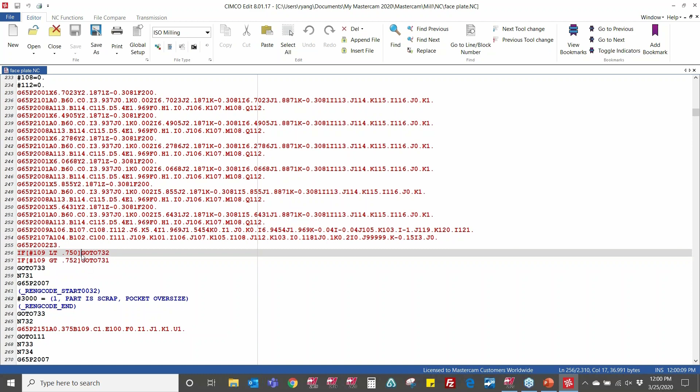Well, look up here and right above that code where we cut the window, gosh, somewhere up here is where it's at. And it may be embedded in one of these macros, but I know it works because we made this work on a customer machine, that sends it right back to that flag we made right in front of all that cut. And then it makes it recut the window. It writes this all out for you, so you don't have to.

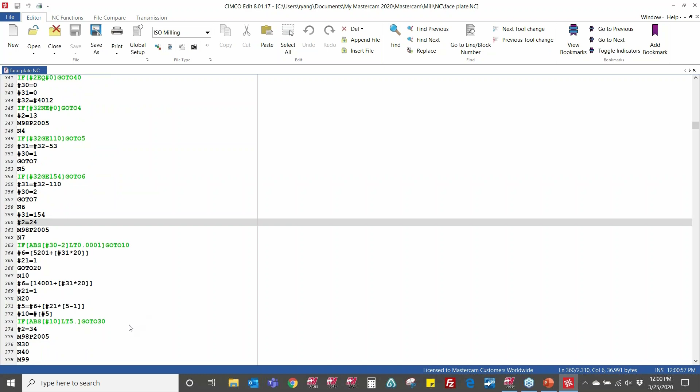And then at the end, after the M30, and that's our M30, it's right there. So after that is where it outputs all these macros it needs to run this program. And this will all load up separately on your machine's control. I know there's a lot going on, but just remember it's writing the code, so you don't have to. It's a lot more comprehensive than the standard probing routines that you may have on your machine.

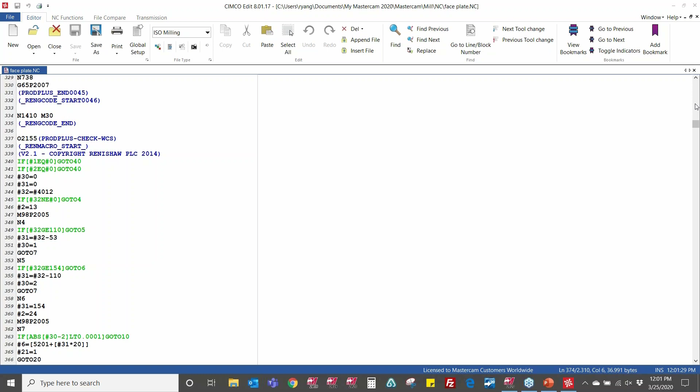So, the point is, let the software do the work for you. You don't have to resort to having to type at your machine tool to write this out manually. I'm sure you all have projects you work on that have some really precision features to control for. This product really gives you the flexibility you need to get that done and get it done accurately. Let's see, I think I've covered just about all we have to show on this.